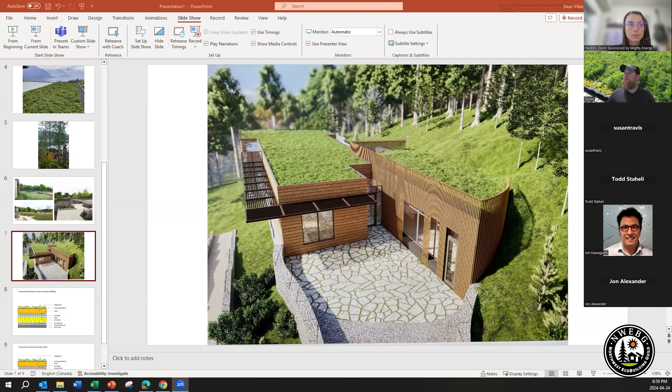Why is this not working again? As you can tell, I'm a lot more comfortable with plants than I am with technology. So please bear with me.

Just skip through. So here is what is referred to as a protected membrane roof assembly. This is where you're going to have your insulation on the exterior of the structure, quite often used where you're going to have architectural features such as beams and vaulted lofted ceilings on the interior. You don't want those taken up with insulation and drywall; you want those architectural features to stand out. So you would have your roof structure, then you get into your primary membrane, a root barrier, then your insulation, a filter layer, drainage layer, and then your growing media and vegetation.

One of the benefits of this type of system is you don't have to worry about potential condensation, because you've got the insulation that, especially over a concrete structure, is insulating and stabilizing the temperature of the structure, so you don't get that condensation that can happen.

The other main style is a conventional roof assembly. This is what most residential homes and a lot of older buildings have. Here your insulation is on the interior of a building, or it is sandwiched between cover boards, creating a multi-layer exterior. Used over top of your roof structure, or in this case your cover board, you would then have your membrane over top of that, a root barrier, and then your other layers such as drainage layer, filter cloth, growing media, and vegetation.

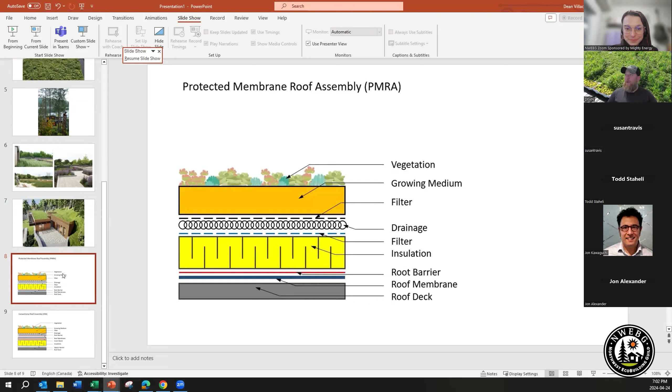Problem, thanks so much. So this is your protected membrane roof assembly, and then we have your conventional roof assembly.

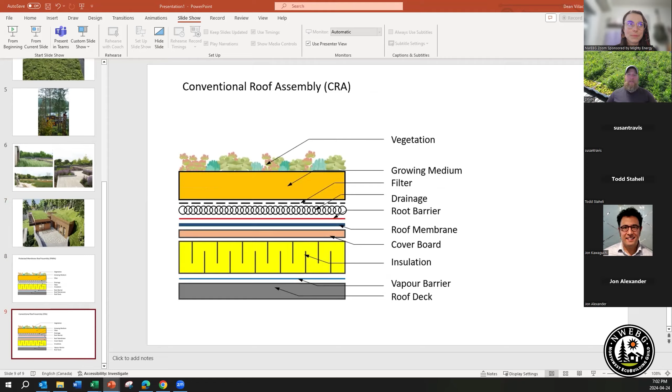So simple, but complicated at the same time. But it's not something that is beyond the average person to take on. There are definitely structural aspects you need to take into consideration. When building a green roof, you can have hundreds, if not thousands of pounds up on your roof, so you really need to ensure your structure can support that. You want to make sure you're working with an engineer and/or architect to ensure that those weights are being taken into consideration, especially if doing a retrofit. If you're doing a new build, that's a great time right at the beginning to ensure everything is designed to maximize the benefits of your green roof, which are very wide ranging.

Some of the big ones are urban heat island effect, stormwater management, as well as home energy efficiency. With urban heat island effect, as we've developed and grown our urban scapes, there's a lot of concrete, a lot of black asphalt and things of that nature. Those all absorb heat and hold on to it, continuing to accumulate and multiply over multiple days, resulting in situations like we had here in Vancouver or British Columbia a couple of years ago with the heat dome, where hundreds of people across the Pacific Northwest died because of the heat. Those kinds of heats are really exacerbated in an urban setting, especially with more air conditioners being used. Not only do they use quite a bit of electricity, the heat from your building is just being vented outside, adding to that. With a green roof, that can help break up that hard surface.

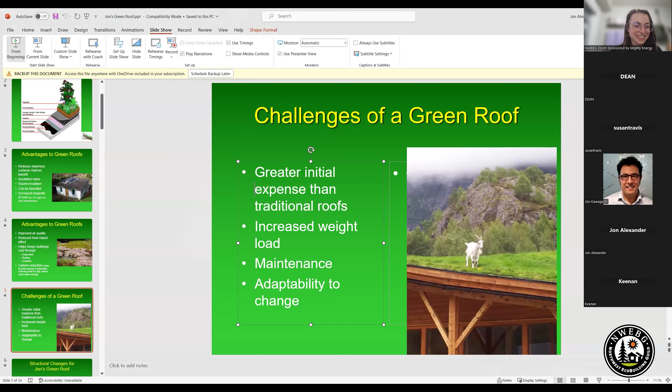Awesome, and I think you're still... there it is, hey, okay, I got my unmute going.

Very good. First of all, Dean, thank you so much for your presentation. That was just excellent. I so appreciate what you and your colleagues at your nursery are doing with green roofs. It's awesome, you've taken it a long ways.

I'm going to be presenting about the green roof that I have. Literally, I'm in my home office, which is in my garage. Oops, I didn't want to do that, go back, oh there it is. My green roof is on my garage, and it's directly above my head where I'm speaking from right now.

I have a skylight over my desk, and it's just all around that. If I remember, before it gets dark, maybe about 10-15 minutes from now, I'll take my phone up there and we'll broadcast live and give you a quick show around up there.

This green roof that I did, this is on, we live on a slope, and we look down on the roof of this garage. The garage roof is flat. The roof surface is about 900 square feet. And previously it was amazingly ugly.

I just want to go quickly through the mediums. Dean did that, but the slides weren't quite there. The vegetation on there, this growing medium, which is what we call the soil.

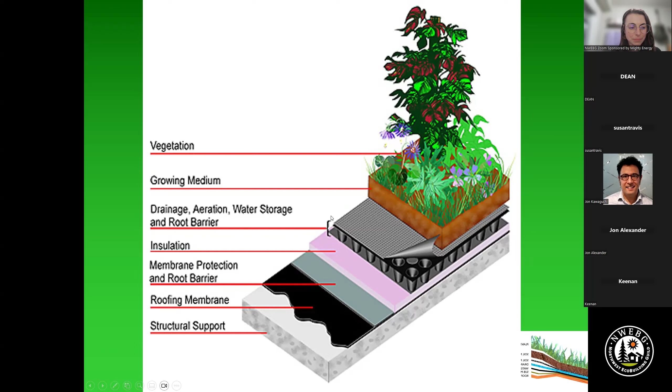So I want to go quickly through the advantages and disadvantages or challenges of a green roof. What got me initially very interested in green roofs was I heard a talk by a salmon specialist dealing with watershed issues in the urban environment. In the urban environment, for our endangered species of salmon that we have in the Seattle area and Western Washington and probably lower BC as well, you can't have more than 10% of a watershed being impervious surface.

The plants on green roofs help filter the air. One of the things I really love about green roofs is that it takes a dead space and makes it into a live space. I love the mountains, and I love plants and gardens and things like that. This opportunity as a longtime general contractor to mix the plant and living world with the built environment is something I'm very passionate about and was really attracted to heavily.

In urban areas, green roofs can reduce the heat island effect, keeping buildings cool through evaporation, shading, and insulation. Dean covered the carbon reduction. One aspect, especially in larger commercial projects, is that it reduces the need for stormwater storage, which is a big issue. Sometimes stormwater storage uses large concrete pipes, which are incredibly high in embodied carbon. So green roofs in that respect can make a big difference in carbon consumption.

But really, in an average residential green roof situation, if your highest driver is to have as little embodied and consumed carbon as possible, invest the money instead into more insulation, having someone come do a blower door test to make your house tighter and more efficient, and maybe some solar panels as well. I think that's where you get the best bang for your buck. But on a larger scale with lots and lots of green roofs, it does make a good difference, and it is a good thing.

Challenges of green roofs? Well, if you have a goat on your roof, that might be a challenge.

I like what Dean said, and I think about it a lot: if you're going to have a green roof, have fun with it. One of my dreams that I haven't got around to is having a cutout of a goat posted up on the edge of the roof that people can see from the street, with a motion detector light that goes on at night with a little sound effect from the goats at the same time. When you have your own green roof, you amuse yourself with different ideas of things to do with it, for sure, or at least I have.

There's the increased weight load, and we'll talk about that in a little bit. Maintenance, when I first installed the green roof, maintenance was for this 900 square feet, I put about 10 minutes per month into it. And since then, it's become a little more, it changes continually depending on the season.

Every year there's new plants coming, and the diversity of plants go up there, change quite a bit. And the other challenge is adapting to the change, adapting to the new plants that happen up there, some invasive plants, some of the critters that go up there, adapting to the climate. The first sedums that bloomed every year always were in June. Now they're in early May, late April. So the climate's changed in 21 years in my backyard, at least, from an in-depth study of one roof.

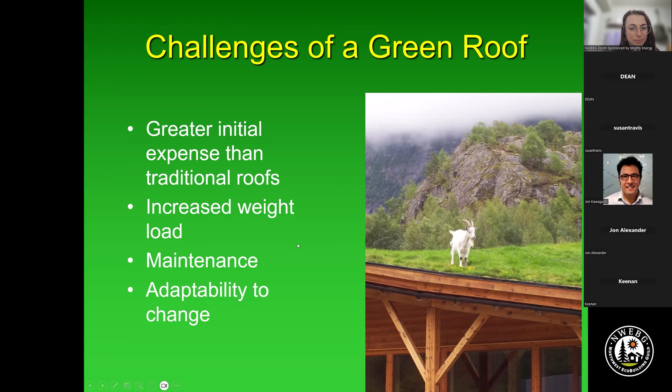For the structural changes for the roof, part of the process is I went to Chris Webb, who's an ex-Guild board member and an environmental engineer, and he came up with a structural plan for how to make this garage deal with that additional weight.

And with the green roof, like any structural element, you're dealing with a live load and a dead load. The maximum live load is when the water, the soil medium, is completely saturated. That's the most water that we calculate for, or having a snow load on it, which isn't super common.

So what we came up with, supplemented with volunteers that helped from the Guild do this, including, thank you very much, Tom Balderson, who helped put in one of the beams for it. He was a great help with it one day.

We put in a 3.5 by 15-inch PSL over the large 2-car garage door. That helped a lot. We put a 4 by 12 Doug fir beam over the center of the midspan of the rafters with a post in the center. And the rafters are a true 2 or 2.25 inch by 13.5 inches of Doug fir, the original rafters, of course.

In the back part of the east part of the garage roof, where my office currently is, there are 2 by 6 rafters, and he had us double that up. And then the siding, we had to remove the siding on all 4 corners to allow for a 4 by 8 sheet of plywood shear walls with hold-down Simpson HD8s on each end of each of the pieces of plywood, on each side of the corners.

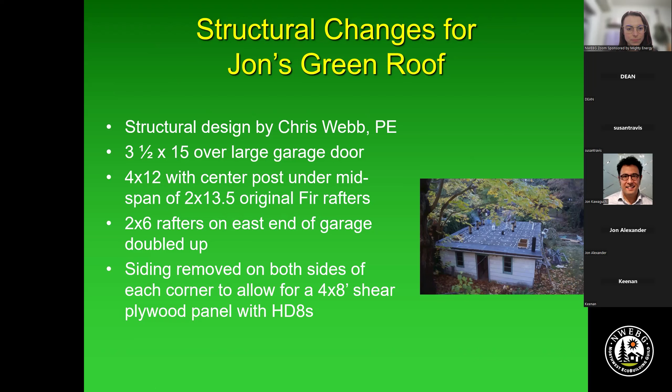And in all the earthquakes we've had in 21 years, it's worked quite well. Actually, we haven't had any, but hopefully it worked quite well.

So we're doing this as the first project of the EcoBuilding Guild, the Seattle chapter's effort to take commercial green building technology into the residential sector and make it affordable. In other words, do it on the cheap. And our budget for doing this whole project was also limited, we'll say.

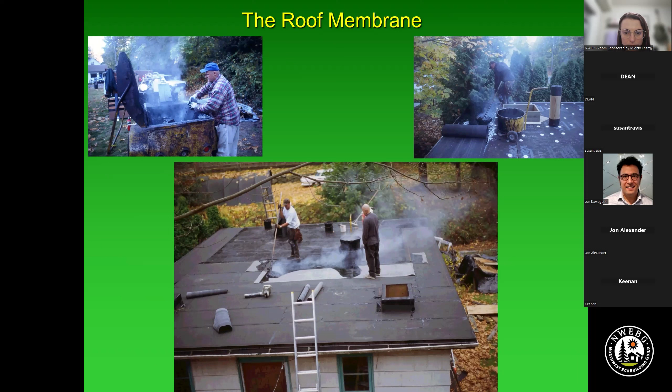So for this particular roof, we got a donation from a roofing company for a hot tar roof. And so we did a hot tar roof, and my neighbors came around and asked what we were doing. I told them we're doing a green roof, and they said, this is green? Because it smelled horrible for at least a block away. Now I'd never do a hot tar roof again. But it's lasted and worked really well, and I feel badly for the workers who work with hot tar roofs.

And then we put down the root membrane, which was really just a special plastic membrane, not so expensive. But the idea is plants and trees with tap roots can go into the roof and damage it, and we're really concerned about that. You can see in this picture the big leaf maple that hovers over the east side of the roof, and it's just loaded with little whirlybird maple seeds that drop down onto this roof. That's been a big problem, particularly in the beginning.

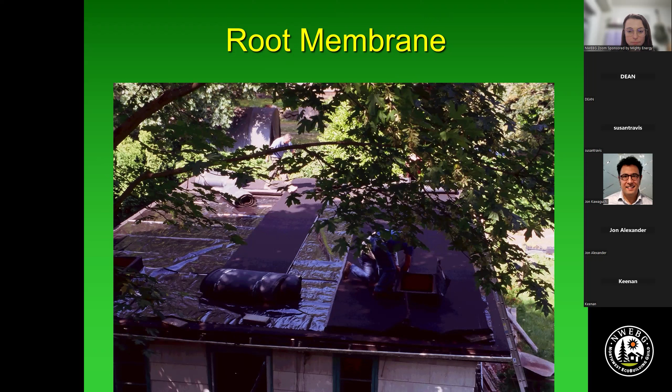One of my adaptations to that early on was I got the idea of putting a big branch going from the ground up to the roof, and then squirrels, in their natural tendency to explore things, started going up there, and they eat maple seeds and helped me out quite a bit in controlling the maples.

This is on another project, actually one that Tom Balderson designed up on Phinney Ridge, where we used a TPO roof. And after talking to Dean, I don't think TPO would be my first choice hereafter. I like the idea of maybe a torch-down roof or something that's thicker and more resilient, but this worked out really well in this particular example.

TPO roofs are, as it shows in the upper right-hand corner, just heat sealed down with something that looks like a big hair dryer type of device.

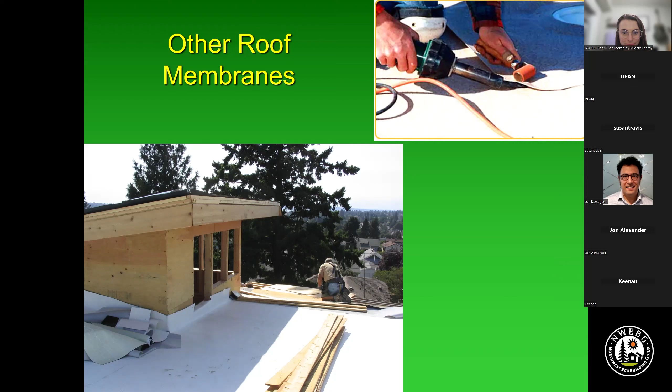Then the drainage mat is very, very important. It's like a thin egg crate with a filter membrane on top. You put that down, so when water goes through the soil membrane, it easily drains out at the low slope, which is to the east of the roof, away from the left-hand picture. That's something that's easily available — I can buy it from many construction suppliers around town, commonly available.

Dean talked about 3 different types of green roof systems. We used the dirt, the soil medium or growth medium, and got it up onto the roof, which is very lightweight, by way of a conveyor belt rather than a tray system, because we couldn't afford a tray system.

On the bottom left-hand picture is my backyard next to my garage. That woman is Robin Rogers, the first director of Built Green, who came by to help me use the grain shovel and shovel it onto the conveyor belt. Then on top, you can see it getting moved around by way of 5-gallon buckets, which worked pretty good, and rakes.

On the right is an example — I don't have a picture of that from my Phinney Ridge project, but we got the soil medium up there by way of a hose, just spraying it up, because it was 2 stories up and too much work to do with a conveyor belt.

And it works super efficiently. It's a bit more costly, but I believe Pacific Topsoils has that service as one of their options, and there are other companies that do that too. It's not hard to find someone to do it — it's really just holding the hose. It doesn't take 3 guys; probably 1 guy holding it and another supervising would work pretty well.

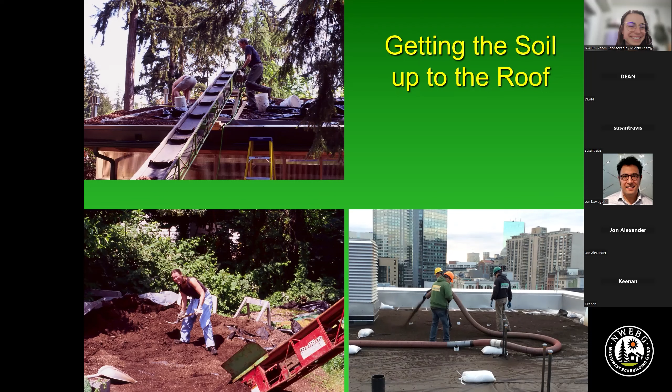Here we are starting to water down the roof. You can see on top of the roof there are some raised bed areas used later for certain purposes. There's a boundary around it so the soil medium doesn't fall off the roof, made of rigid plastic that we zip-tied to the drainage mats, and we're pouring the soil all over there.

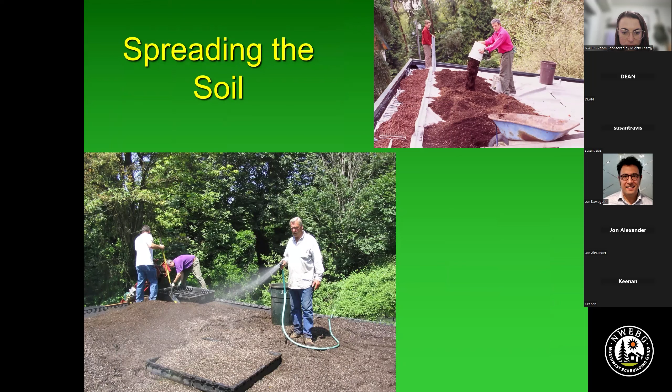Here we are — some friends of mine who are landscapers volunteered, and we're planting the plants. The interesting thing about sedums is that if you break them up and plant them in a little soil and water them over the winter, which we did in my backyard with a small number of sedums, they grow into individual plants — each branch will grow into its own plant.

Each one of these plants out there — we started with 7 species of sedums, 6 of which survived. I started with like an inch-long branch from one particular plant, which gave us maybe 20 plants from the original purchase. It saved us a lot of money and worked out really well.

This is Patrick Carey, the Guild's project director for the Green Roof Project, planting things along. I think of him as Patrick Sedum Seed, as opposed to Johnny Appleseed.

I see it's getting dark out right now, so I'm going to switch off to my phone and walk out to the roof while it's still light enough to go out there. Hopefully this is going to work. Okay, going on Zoom.

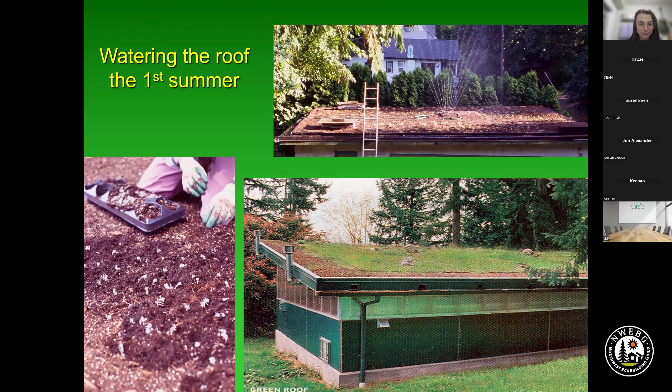This roof, this lower right roof, is a roof I did with Rob Harrison on a project in Kirkland, Juanita area. That was a garage and a workshop, a really beautiful structure that worked out super well. Ended up being in Sunset Magazine. And then this is a close up of the roof after the end of the summer, I think, of how much growth we'd gotten. Not sure exactly.

And then I decided to try a rock wall wildflower mix up on the raised beds, and this is what I got the next spring, which was very gratifying.

So every spring in March, there's a moss bloom, which I find rather beautiful when you take a close look at it. I think it's some of the details of observing the little minutiae of the green roof that's quite remarkable for me to see.

I think they integrate really nicely into a green roof if you've got enough sun and want to use them for that. For really large green roofs being built on commercial buildings, I think it's a fantastic way to go. There's now solar integration with agriculture, growing farm food as well, and that could be done on large roofs too as a possibility. Like Dean said, solar panels become more efficient in these conditions because the evaporation from the green roof cools the bottom of the panels, giving them a higher level of efficiency than they'd have just sitting there heating in the sun.

And it also gets you more diversity in your plants, having more ecosystems going, because the plants would be different underneath the roof than out in the direct sunlight.

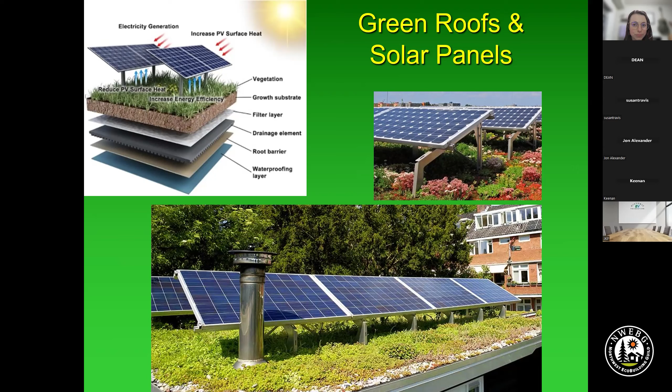Though on a steep green roof, it might not be the best idea.

So a lot of really wonderful green roofs, and there's a lot that we've learned about green roofs, and Dean and his company and others still in the field have learned about it in the last 21 years. I've just been fortunate enough to live with one for 21 years and never have it leak and never have any disasters with it. I've had all kinds of birds up there. There seems to be worms going up there, but no slugs, thank goodness. The raccoons go up there from time to time, and the squirrels go up there. That's pretty much the extent of our experience of various things up there.